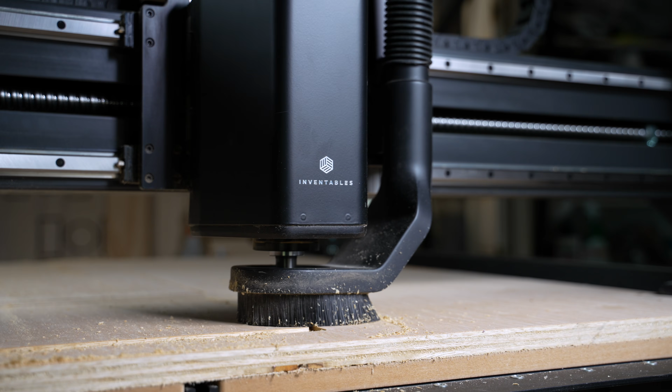Now, before we cut it out, we actually need to design it. And for that, we're gonna jump into Easel Pro.

Now we're just gonna be designing a single cabinet, but you can definitely use this entire process to do a full kitchen build out if you wanted.

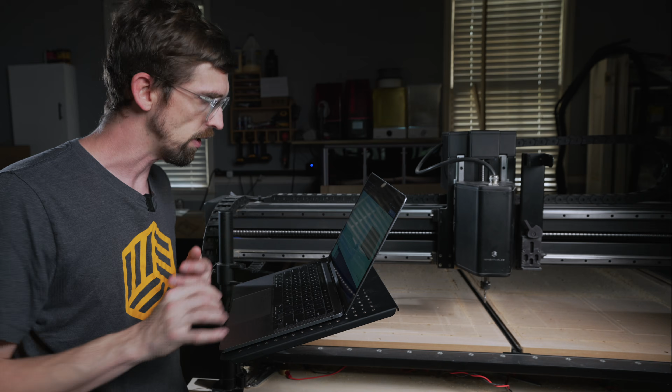So a quick overview of Easel over here on the left side, this is where you're going to be able to do all of your designs. You can see we can add simple shapes, text, pro designs, all kinds of stuff right here.

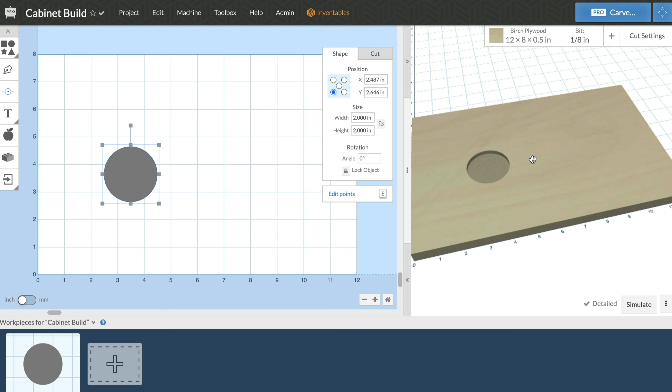Over here, this is actually giving you a real-time preview of what your design's going to look like. So if I just threw in a circle, you can see that my circle is now on the material and get an idea of what it's going to look like.

Then up here at the top, you can define your material. So right now this is 12 inches by 8 inches by a half inch thick.

And then when you have an object selected, you can actually define its shape, so you can move it around to different positions. So we could put it at 0 if we wanted. We can also define its size. We can lock these dimensions, so we can make this 3.

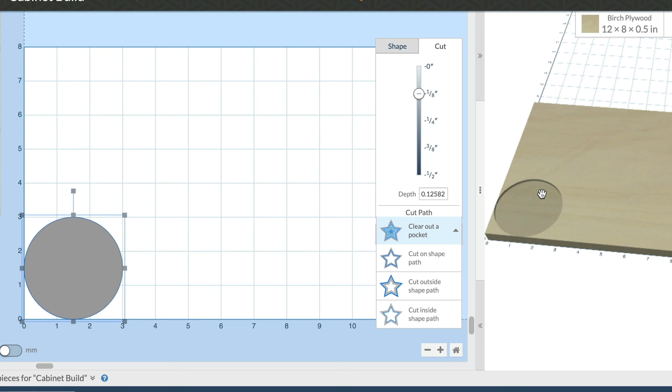And then you can define the cut, so this is gonna give you the depth of cut. Since our thickness is a half inch thick, this can go all the way down or all the way back up. And you can also define how this is going to cut. Right now, this is making a pocket, but you could also make it a cut along the path. This can go all the way down and it would cut that piece out, and you can actually see that it's going to cut through the material as a result.

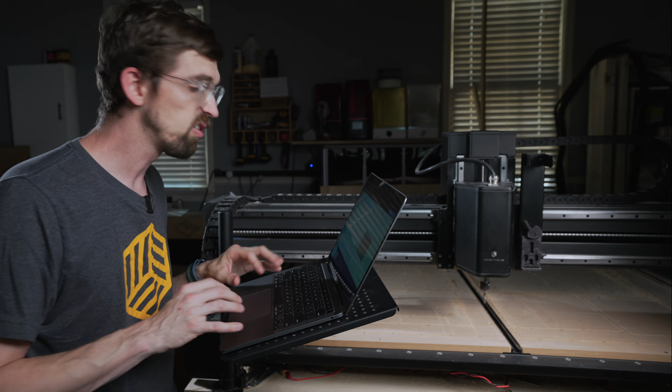So let's actually do our design. In this case, we're gonna be using the X-Carve Pro, and then we are going to set up our material.

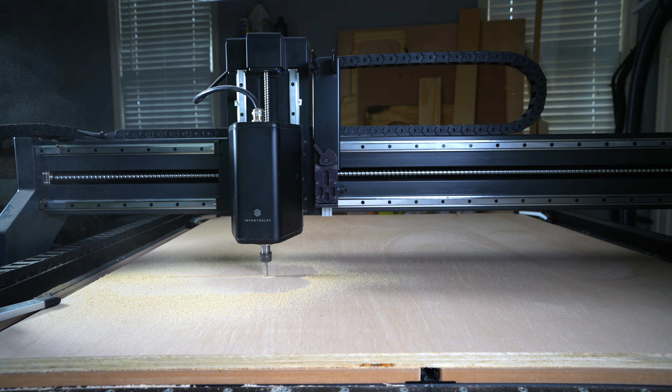So the workbed on the X-Carve Pro is 4 by 4 feet, but you can actually go longer, and you could actually do a full 4 by 8 foot sheet, and you're gonna be using tiling. We're gonna get deeper into tiling in a future video.

So for this example, we're gonna be using a 4 foot by 4 foot sheet, so 48 inches, and then it's going to be 3/4 of an inch thick. Now you can see this is pretty much our entire work area. So if I zoom all the way out, this is what I'm working with.

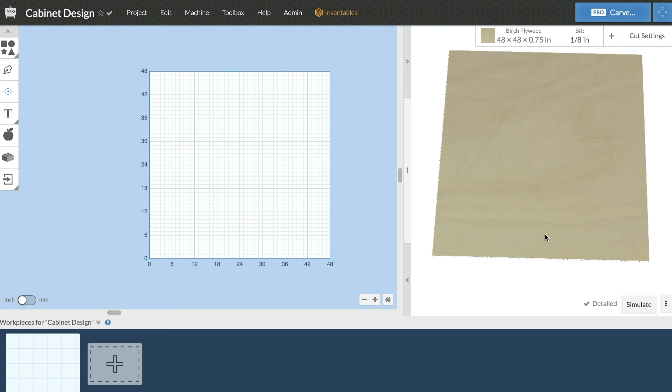Now to actually design our cabinets, we're gonna go into the Cabinet Maker app. The apps are over here by this little icon. You can see right here at the top, we've got our basic cabinet designer. This is gonna pull up a little module that's gonna walk you through the full process.

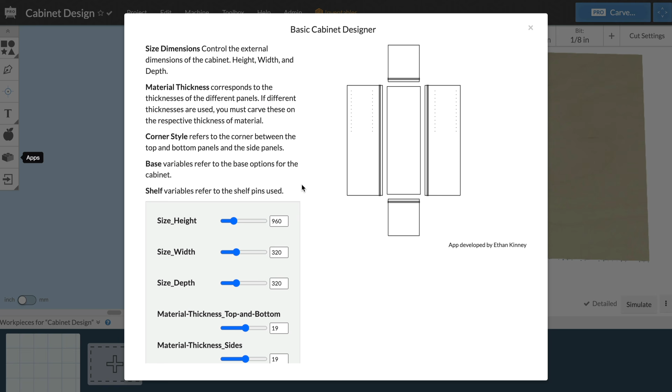Now, one thing to note, these are Euro style cabinets, so they are frameless, meaning you're not gonna have any type of face frame that's going to be on the front of your cabinet. Also, everything currently is in millimeters, so we're just going to have to convert it.

So our height is going to be 30 inches, which is 762 millimeters. Our width is going to be 20 inches, which is 508 millimeters. And then our depth is going to be 7 inches, which is 177.8.

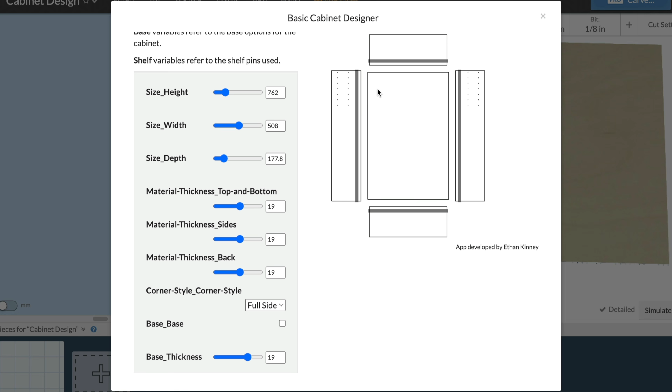So by default, all the material thickness is already set to 3/4 of an inch, so 19 millimeters. We're not going to have to adjust that. And you can see as we are adjusting our heights, our widths, and our depths, it's actually giving us a preview of what it's going to generate over here on the right side.

So this is a flat pack version of our cabinets. You can see that we've got our top, our bottom, both of our sides, and then our back right there in the middle.

And we're actually gonna create our shelves and our door in a separate workpiece here in a minute. Now the corner style basically is, do you want your sides going all the way to the top? So if you looked from the top down, you would actually see the sides of your cabinet, or do you want the top going all the way across? So if you look at it from the top down, you only see the top.

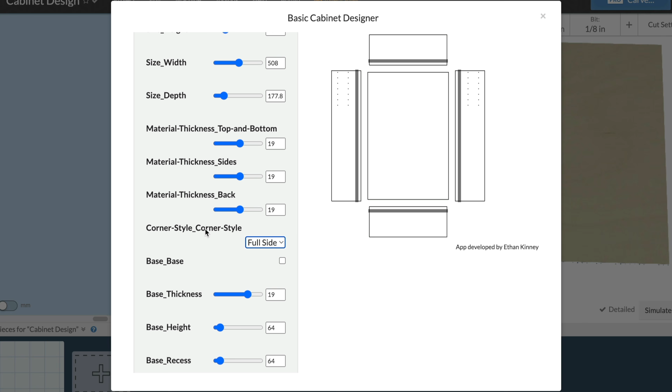That will depend on where you're going to put it, but in my case, I wanna have the top and the bottom go all the way across so you don't see it when it's hanging up on my wall. So for that, we're gonna select full top. You can see that our sides get a little bit smaller and our top and bottom get a little bit bigger.

So we're not gonna do a base, but if I did select it, you can see this is basically going to add a toe kick to your cabinet. So if you're gonna be doing base cabinets, that is where that would be. And you have all of your settings for that.

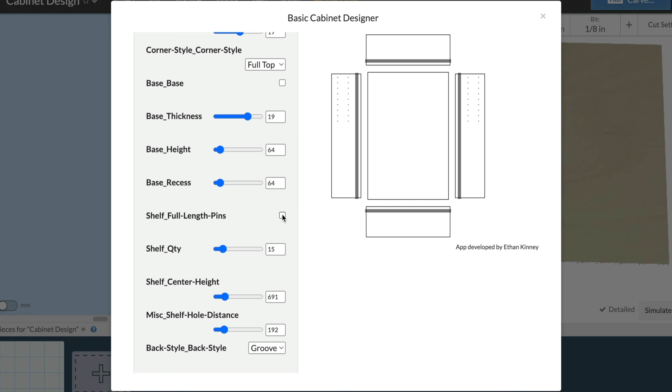And then we have shelf pins. So you could define the number of pins that you want with this slider, but in our case, we're actually going to do shelf pins all the way down the side. So I'm just gonna select that. So none of these settings we'll have to worry about.

And the very last part has to do with how you're going to connect these pieces together. Right now, you can basically, we have a dado on all the sides, meaning you're gonna have a slot that's about 3/4 of an inch, and that is how you're gonna connect it together. You could also have that go all the way to the edge, so it's more like a rabbet. And to do that, you would select your back style as flush. And you can see that goes all the way to the ends.

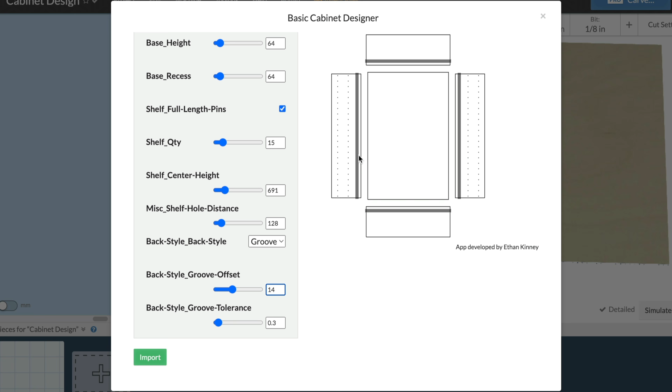But in my case, I actually am going to do a groove because I'm going to use that to mount it to my wall, because I'm going to screw in a 1/2 inch thick board and then put the cabinet on top of it and then drill through it. So I basically need a 1/2 inch gap on the back of my cabinet. So for that, I'm going to put in 12.7 millimeters or 1/2 inch, and that's going to get me pretty close. And then you can adjust your tolerances depending on the material that you're working with.

Now, once all of this is done, we're going to click this import button here at the very bottom. And you can see once I do that, everything gets placed on my board. And over here on the right, you can see a preview of what this is going to look like. So now we have our top, our bottom, our back, and our sides.

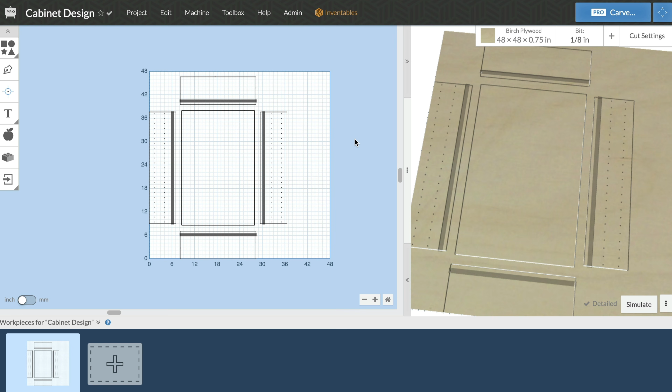We actually need to go ahead and make our door. And to do that, I'm going to do that on a brand new workpiece. And you can add workpieces down here at the bottom. That's what that big plus is. This menu might be collapsed. If that's the case, just hit that arrow. It's going to pull up.

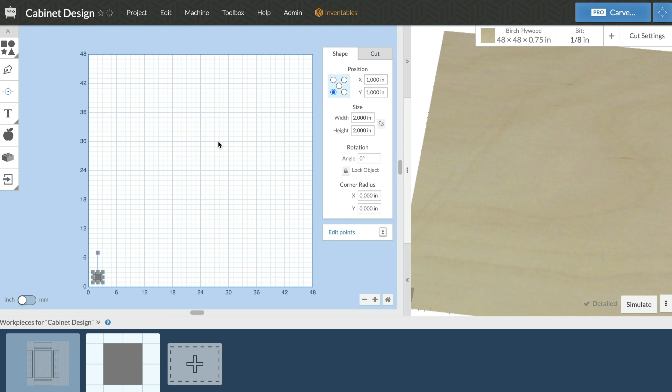So I'm going to select a new workpiece, which is basically like making a new page or a new artboard. And I am going to add a square because I want my door to be the same size as the front of my cabinet. And again, the size of that cabinet is going to be 20 inches by 30.

Now I'm going to come over to the cut menu because you can see right now it's basically making a big pocket of the door, but we don't need that. We just need the door cut out. So to do that, I'm going to flip this over to cut on the outside of the path. And we're doing it on the outside so that our dimensions stay the same.

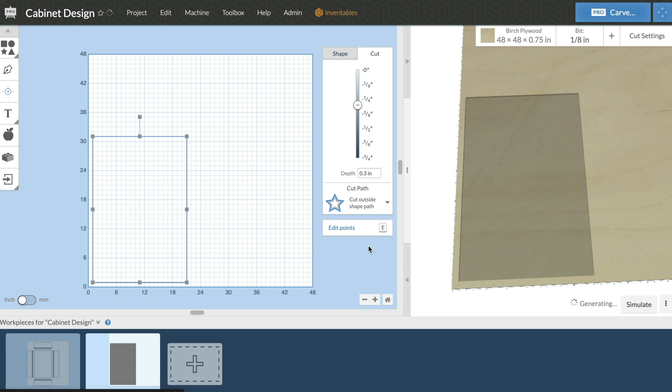If we did it on the path or on the inside of the path, then you're going to be taking out some of the material because of the width of the bit. So if you actually want the piece to be what you put in the numbers to be, make sure and select cut on the outside. And then I want to make sure this is all the way down at the bottom at 3/4 of an inch. And once I do that, you can see that we have this cutting out.

And now we're going to add our shelves. And so our shelves, the width is going to be the inside width of our cabinet, which is going to be 20 inches minus the thickness on the side. So 2 of the 3/4 of an inch or 1.5 inches, which is going to give us 18.5 for our width. And then for our depth, it's going to be 7 inches minus the thickness of the material. So that gives us 6.25 minus that 1/2 inch gap we have in the back. So 5.75 inches, and that is going to be our height.

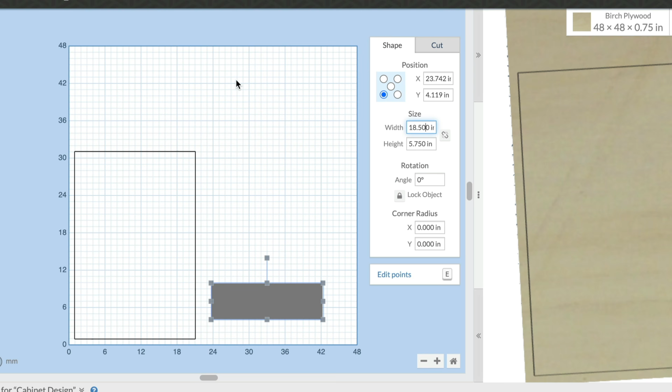Now that might be a little bit different depending on what your tolerance was. And then sometimes what I actually do with the shelves is I'll just assemble the cabinet first, and then go in and measure the shelf since you're just going to be sliding it in anyway, and then see what that depth is going to be. Just in case something isn't perfectly square, we can make sure that it's actually going to fit. And again, like our door, we want to make sure our cut is going on the outside of the path and it's going all the way down.

Now I'm going to do 3 of these, so I'm going to do Control-C, Control-V, and Control-C, Control-V. Now from here, you can definitely go in and move your pieces around to try to fit as much as you can on one board. But for the sake of the time of this video, we're just going to keep it as it is right now. Now, one thing we are going to go ahead and add to the door is the actual hinge.

So we're going to be using soft close frameless hinges. So they have a circle pocket that is 1.25 inches, and you go in about half the thickness of your material, so 0.375 inches. So you can definitely use a drill press or something later to do that, but since this is already on the machine, we might as well carve it out from here. Now the trick that I do to get that is first center everything on the 0, 0 position or the origin of your work bed.

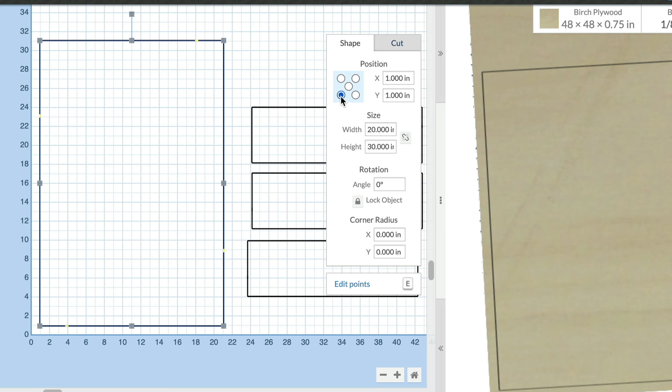So I'm going to select my door, then over here on the position, you can see it's at 1 and 1, and it's lining up on this corner. So what it's saying is this bottom left corner is at 1 and 1. I want that to be at the origin. So if I put this to 0 and 0, you can see it moves down to the origin. Now I do that because now when I go in and add a circle, which is going to be how we do our pocket, I'm going to be able to position it relative to the origin, so I'll make sure everything is spaced right. But before we do that, we know that the size is going to be locked.

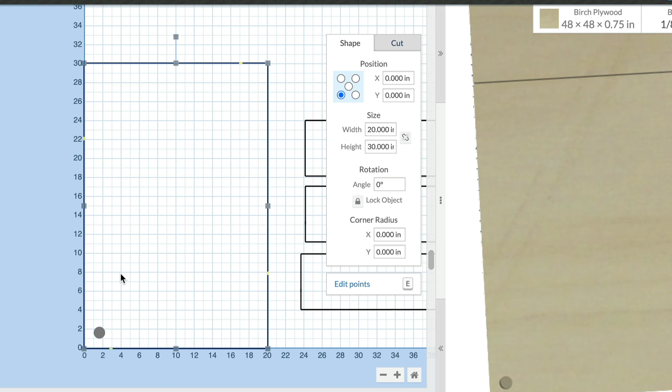So first off, I'm going to hit that chain because I want the width and the height to be the same. I'm going to do 1.25 inches. And now we have a 1.25 inch diameter circle. And then the spacing of the hinge is going to depend on the one that you get. But let's say that your hinge needs to be 1/2 inch from the edge of the door. You can do that by, again, using your position. So this bottom left corner right now is 1 inch away from the edge, and we want this to be a 1/2 inch. So I'm going to set my X to be a 1/2 inch.

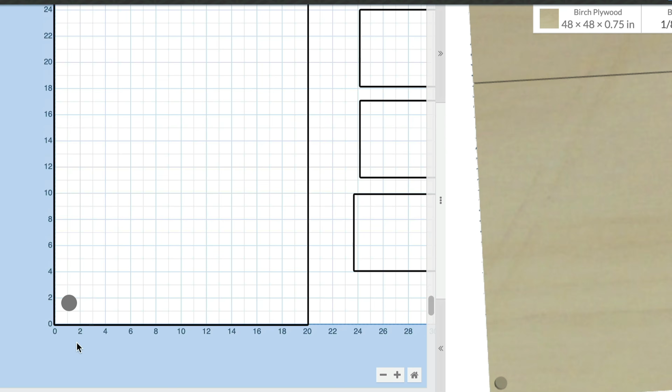And then typically with the hinges, they're not going to give you a specific location in terms of how far it is from the top and the bottom. They just want that to be equal. So for this, I'm going to go ahead and go with 2 inches. And then I'm going to create one more, Control-C, Control-V, and then I'm going to mirror that position from the top.

So we know that our door is 30 inches tall. So if we want to come down 2 inches, we're going to go down to 28 inches. To do that, we need to make sure you're selecting the top left corner because we want that distance to be 28 inches to give us the right gap. And then we want this to be 1/2 inch from the side.

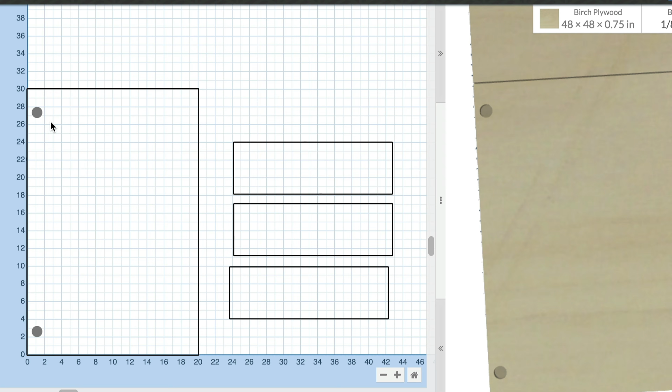And then we want to go ahead and set the depth. So you just select the 2 circles. And then depending on the hinge, this is going to be different. But let's say it's half the thickness of the material, so .375 inches. And then from this point, you can select everything and you can actually move it around as one piece.

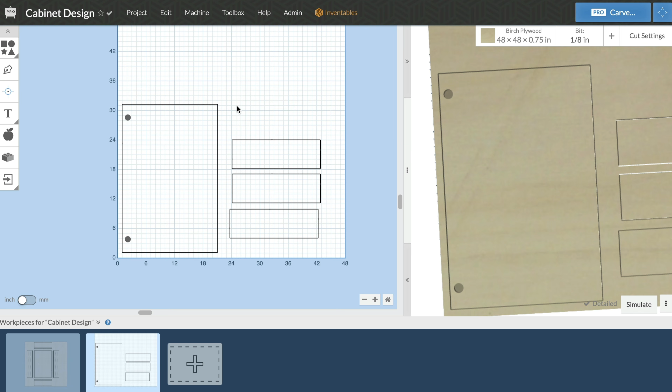And then from here, you can go around and arrange your pieces so you're using the least amount of material possible. If you select multiple objects, your align menu is going to come up. So I'm going to center everything to the left, and then you can adjust the spacing so it's even going up and down or left to right. Now, I'm not going to fully optimize it right now just to save time, but just know that would be your next step. So that's the design or CAD portion of Easel.

Let's talk about how it generates toolpaths or the CAM side of Easel. So we've already been doing some of that work because we've been setting our depths of cut, but we also need to set what type of bit we're going to be using. So if you come up here to the top, you can select what bit that you want to use. And for this example, I'm actually going to be using a compression bit from Onsrud.

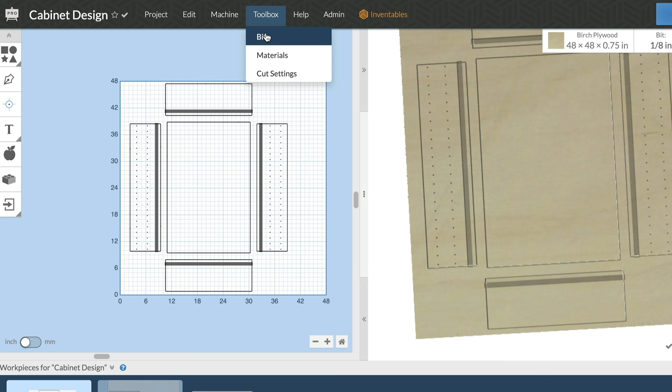So whether you're buying your bits directly from us or you have your own custom bit, this is how you can add it. So if you come up here to the toolbox, you can see we have bits. You select that and then you can add in either an end mill or a V-bit. To do that, you just click Add Bit and then you can select Inventables or Custom. In my case, this is the Onsrud 60-113MW, long name, and this is a compression bit with a cutting diameter of 0.25 inches.

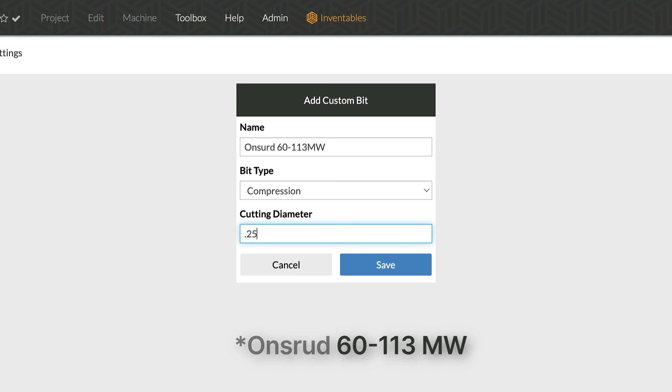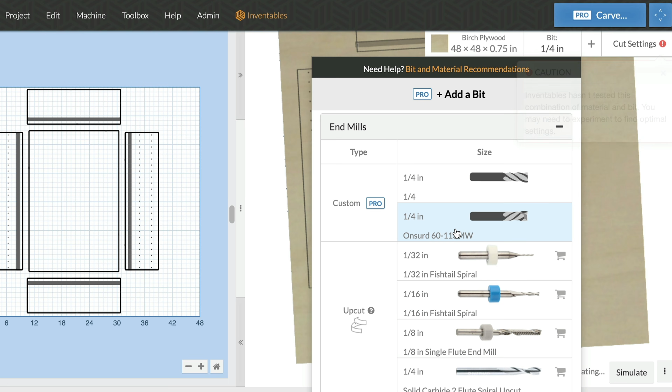And we'll get into all the different types of bits in the future, like upcut, downcut, compression, but for this video, we're just going to select compression and hit Save. So now you can see that it is showing up right here. And if I hit X and I come back up to the bit menu, this is now an option. Now you're gonna get a warning saying we haven't tested this bit with this material, meaning that it's not gonna give you an updated automatic cut setting.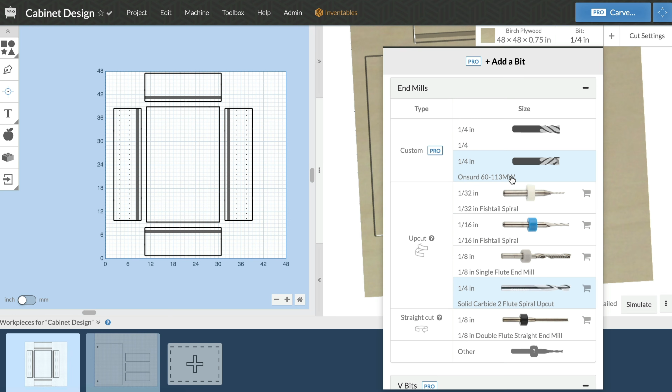So if we actually went in and selected this solid carbide 2 flute, this is one from Inventables, that warning goes away. And now you can see these cut settings have changed. So a second ago it was 30 inches per minute. Now it is bumped up to 128. But for this example, and if you're using a custom bit, you can still adjust those cut settings by just jumping over to manual. Now the feed rate, plunge rate, and depth per pass, again, are a whole other conversation that we'll do in another video. So that's why we definitely recommend just going with our recommended cut settings and then adjust it from there if you're using bits from us.

But for this example, we're gonna be going up to 250 inches per minute. We're gonna do a plunge rate of 30, and then our depth per pass is going to be the thickness of the bit, so 0.25 inches. And then I'm actually gonna drop my RPMs down a little bit to 14000.

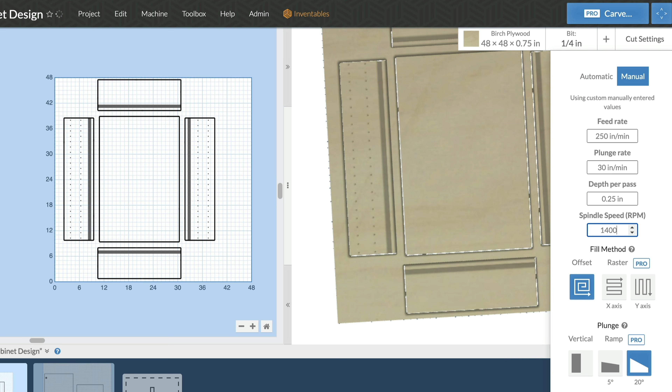And then you can adjust the fill method, and that is if you're doing a pocket. Basically, is it gonna go side to side, up and down, or go around in a circle? The only pockets that we have are gonna be for these dados, but because of their width, they're just gonna be going up and down anyway. So keeping it at the stock setting is totally fine.

And then at the very bottom, you get the option to do a plunge cut. When it first starts its cut, it's gonna go down 1/4 inch, which is our depth per pass. It's just gonna go straight down. If you ramp it down, you can see you're gonna have a 5-degree or a 20-degree option.

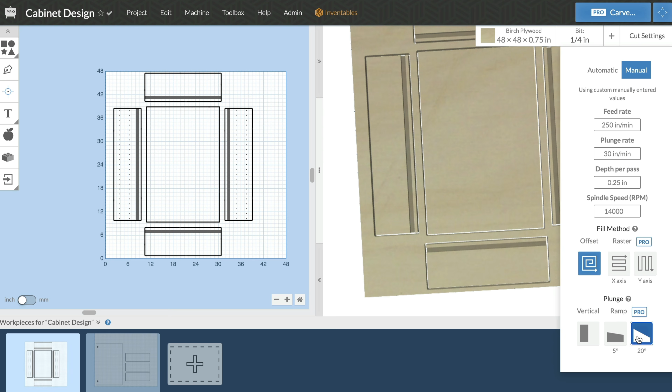It's gonna be a lot less stress on the bit and the machine, and you're gonna get a lot nicer cut. It's gonna add a little bit of time, but especially when you're doing higher feed rates, it is really helpful. And typically we have a 20 degree set as your automatic setting anyway. So just keep it like it is, and then we are good to go.

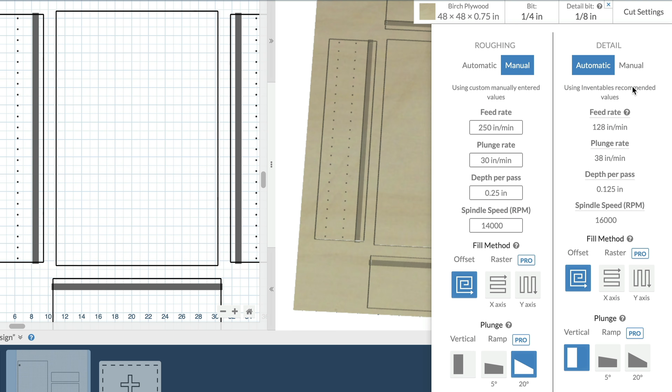Now, one thing you might notice is we are cutting everything out, but you're not seeing our holes for our shelves. And that's because those pinholes are thinner than 1/4 inch, which is the bit that we are using. So because of that, you're actually going to add an additional bit. So I'm gonna select this double flute straight end mill to do these holes. And if I come over to the cut settings, you can see we now have 2. So our roughing and our detail. Now, because we've used this before, you're gonna get some automatic cut settings.

Now, at this point, Easel has everything it needs to actually generate the tool path. And you can get an idea of what that's gonna look like by hitting the simulate button. And you can see we're getting 2 different times. That's 6 minutes, that's going to be our 1/4 inch bit. That's cutting out the majority of our pieces. And then the 33 minutes is going to be for all of our holes.

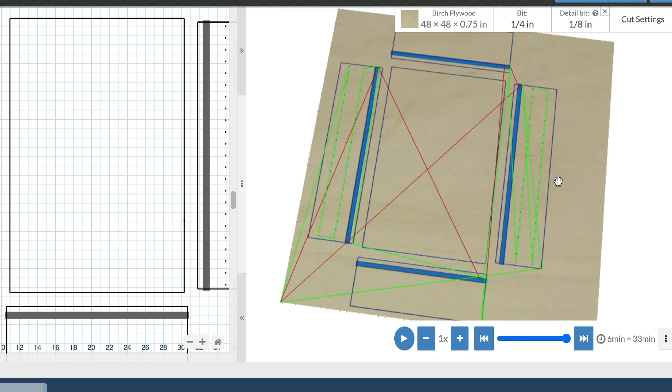Now, you can actually play this back, and you can adjust how fast it's going, and you can see how that bit is going to go across our material. Then anything in red is going to be when it is moving between cuts. Our first cut is going to be in blue, and then our second detail cut is going to be in green. You can see it's doing the green right now.

Now what's really nice is you get a pretty good estimate on how long this is going to take. And we find for folks that are especially quoting out different cabinet jobs, knowing how much machine time you're going to be using before you even do the carve is really, really nice. Because you can basically throw in whatever design you want, you can play around with it, you can build that into your quote or your estimation for your project.

So the next step is to actually work with your material. In this case, I'm using 3/4 inch plywood, and I've actually already cut it down from a 4x8 sheet to a 4x4 sheet just to make it easy for filming and for you guys to see. And you can see that it's sitting on the machine right now. Now you don't actually have to cut this down. You could use our tiling feature inside of Easel, and you could use a couple outfeed, infeed rollers on the front and the back of the machine just to support your material.

So our next step is going to be clamping down our material, and we're going to be using the T-slots on the machine. You have one on both sides, as well as one right here in the middle. We're just gonna clamp it down on the 4 corners for this material, but you could also use brass screws and actually screw this into the workbed.

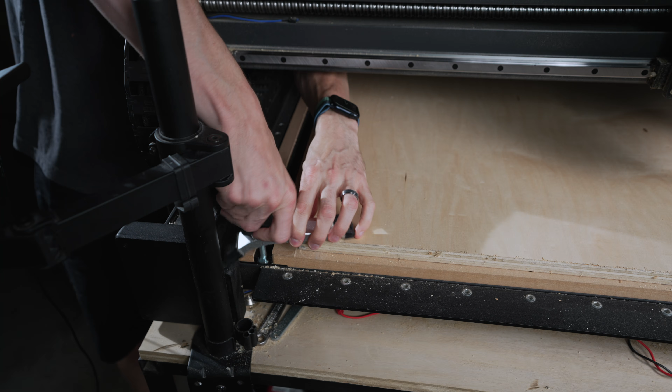And then if you use brass, it's really soft, so if you do happen to hit it with your bit, you're gonna be fine. But you could actually pre-drill your screw locations inside of Easel, so you can see exactly where it's going to cut out, and then you can just put little holes around it for your screws. But in our case, just having those 4 points of clamping, it's going to be totally fine. So you just slide in these clamps, and then screw it into place. And then we're gonna do this to all 4 sides, and then we have our material secured.

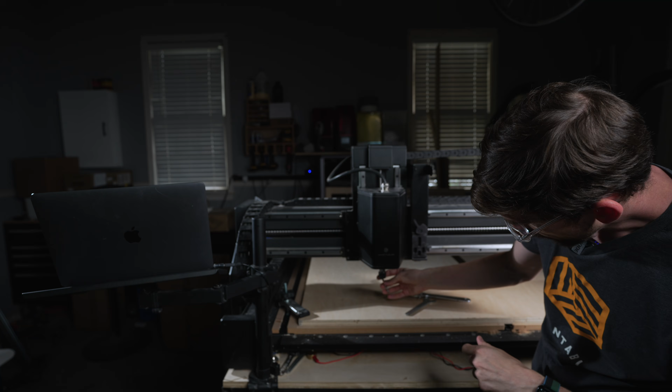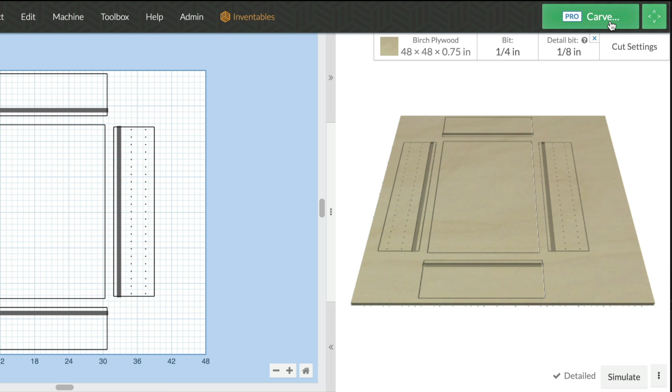So we're gonna be using this 1/4 inch bit, and you just slide it into your collet, tighten it down, and then using some wrenches, we're gonna make sure that we have it tight. So now that we have our material on our machine, as well as our bit inside of our spindle, we can go ahead and turn on the machine. The power button is on the controller, which right now I have on the very back of the machine. And then when you turn it on, you're gonna see these 2 buttons at the top are green inside of Easel. This is going to be your jog menu.

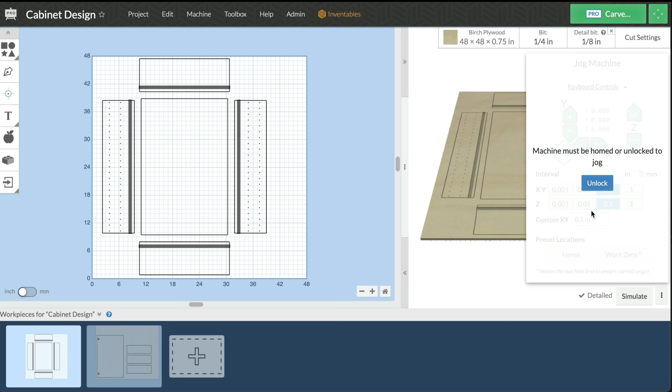And in order to actually unlock the jog menu, it's gonna ask you to home the machine. Again, homing the machine is going to bring the spindle to the very top, and then the X and the Y to the 0 position right here. And you want to home your machine because at that point it always will know how to get back to the position it was before, especially if you're doing multi-stage cuts like we are, or if you lose power or something messes up and you need to restart. Make sure to always home your machine the very first thing that you do. So we're going to unlock it, and we are going to click home.

So one thing to note is I've got this laptop stand, which is this right here. So this doesn't come with the machine. That's also why this is really close when I'm doing the work zero. I just have it clamped down at the table at the bottom.

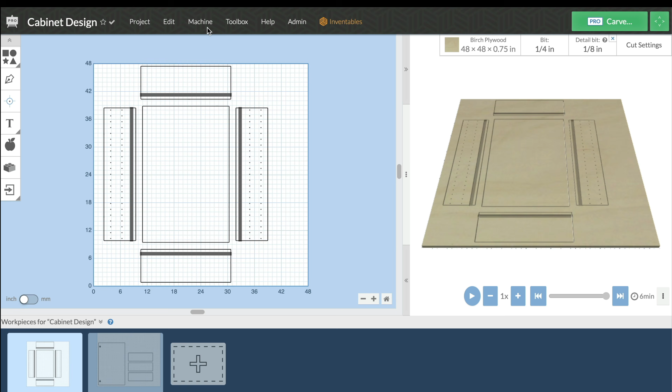Now there is one setting you might want to change that is outside of the typical menus, and that has to do with your safety height. If we come over here to machine, come down to general settings, you're gonna see your safety height as well as your origin safety height. And all the safety height is the distance that the bit comes up when it's traveling between tool paths. So in this case, it's coming up 0.15 inches, so it makes sure it doesn't hit any material, then it's going back down. But you can actually set a different origin safety height, and this is how far up the bit will travel at the very beginning.

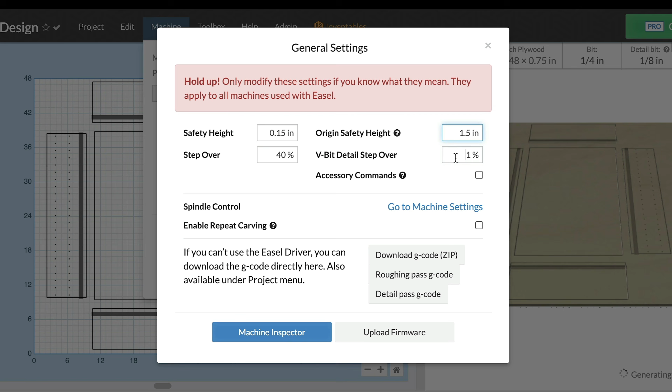Now I'm gonna put this at 1.5 inches, and that's so that I can clear my clamps. Now initially, I wanna make sure I'm clearing the clamps and clearing all the knobs, but once we're actually carving, I want the safety height to be smaller because I'm not gonna be getting close to those clamps. And what that does is it saves you a lot of time that it's not having to come up and come down that extra distance while this is cutting out. So now that we have this set up, we can walk through the cut setup menu.

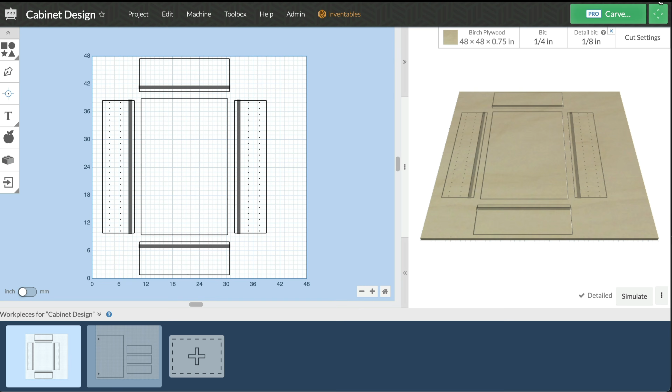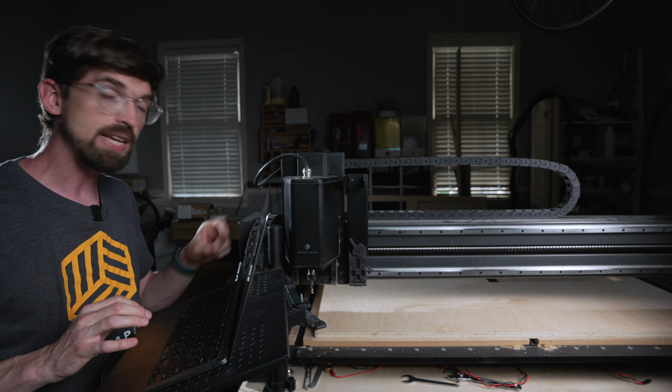All right, if I click on the carve menu, I'm gonna get this step-by-step process to make sure you're set up before you actually start your cut. So first we're gonna confirm our material. So this is birch plywood, it is 0.75 inches. Again, you wanna make sure you actually measure your material, so don't go off of just what you get. Next, we're gonna let it know that the material is secure. And we are going to be doing the roughing pass. Again, the detail pass is just gonna be for the holes. We're gonna be using this compression bit that we've already set up, this 1/4 inch compression bit.

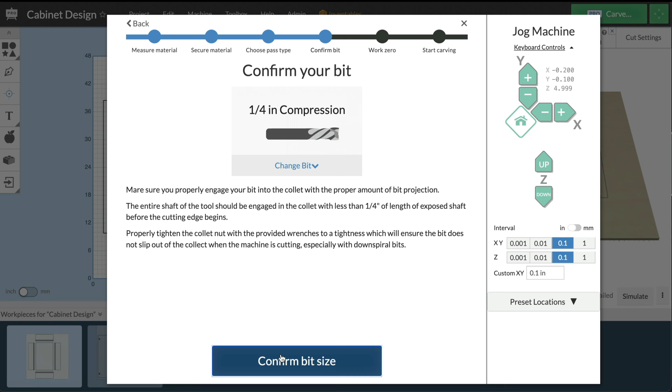Now we're going to zero in the Z axis. We don't know the distance between the end of the bit and the top of your material. So we're gonna use our Z probe to do that. And the Z probe plugs into your controller right here. And then you have this brass puck as well as clamp. This you're gonna put underneath your bit when you run it, and this is going to be clamped to your machine. I'm gonna move this over a little bit just so you can see it a little bit better.

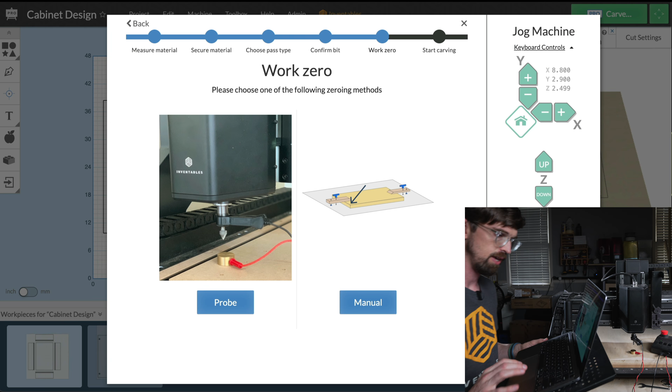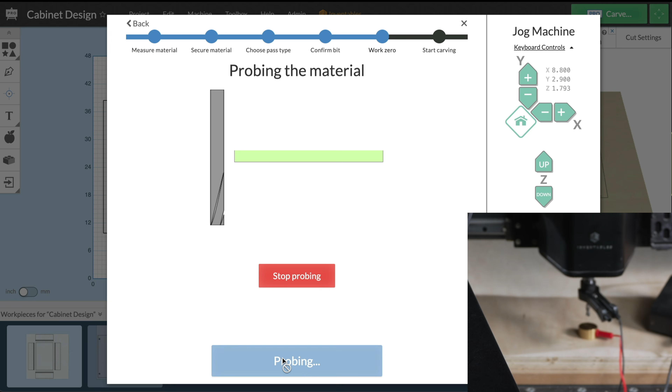And then to probe it, we're gonna click probe, going to confirm the position because it is over the material. We're going to attach our clip. It's already been attached. And then we are going to touch the plate to the bit to make sure we have connectivity. Gonna do that, and when we do that, this is going to turn green. And now we are going to start probing. And then I'm gonna click that our Z probe is put away.

Now our last step is to set our XY0. So we just found our Z0 position. This is going to be the XY0 for your workpiece or your work 0. This is not the same as your machine 0. Machine 0 is what you find when you actually home your machine. The machine 0 is the furthest left and the furthest front that it could possibly be, but depending on your work material, that corner edge might be different. Now in this case, we're using a 4x4 sheet, so they're pretty much the same.

So what I need to do is just reposition this over this corner, and I'm actually gonna move this clamp this way, just so I make sure the toolpath doesn't hit the clamp while we are carving. And that's one thing you want to make sure is that none of your toolpaths are interfering with your clamps when you're cutting this out. So I'm going to use these jog commands.

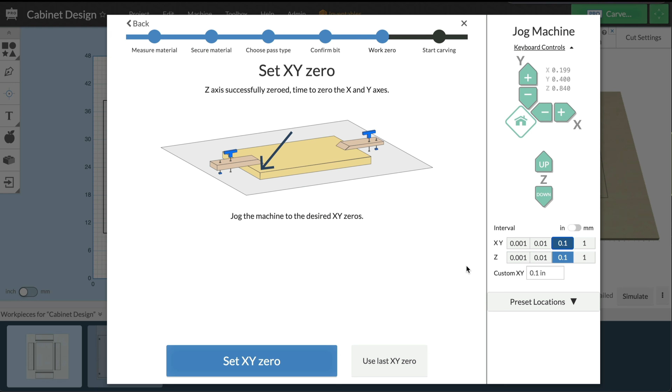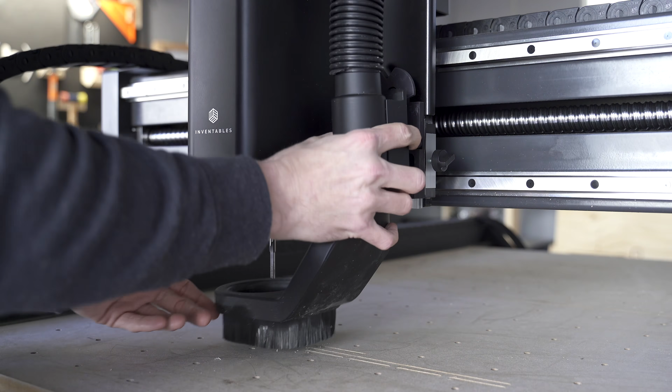Move this over. And then once you have the position that you want, just hit set XY0. Now that position is saved and we're gonna be able to reuse it in the future. Now at this point, you would connect your dust shoe, which is a pretty simple process. I'm not gonna do it in this case so you can actually see it carving out. So I'm gonna skip this.

Now since Easel can control the spindle, we're gonna turn the spindle on. Our spindle is on. And now we're gonna hit carve.

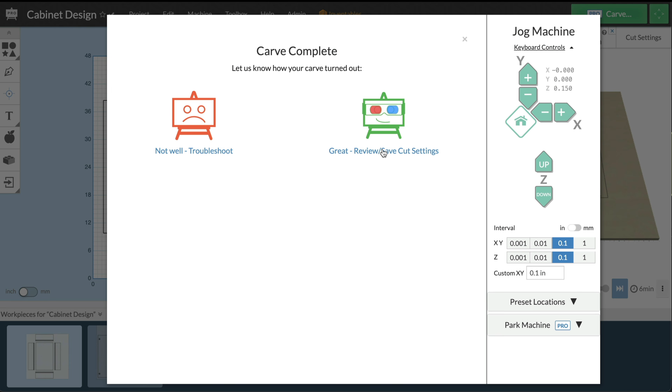Now, depending on how your carve went, you're gonna get a troubleshooting menu. If it did great, you can click this and actually save your cut settings. So if you did custom cut settings, you'll be able to save those for the future. And then if it did not go well, you're gonna get a lot of the common things that we see and the best recommended ways to fix it.

So once you run through that first roughing pass, you're gonna come back in and use your detail bit. In this case, this is going to be an 1/8 inch bit. We're using that to get our shelf pin holes. So you'll switch out the bit in the machine and then it'll run back through the setup menu. Everything is pretty much gonna stay the same except for 2 parts.

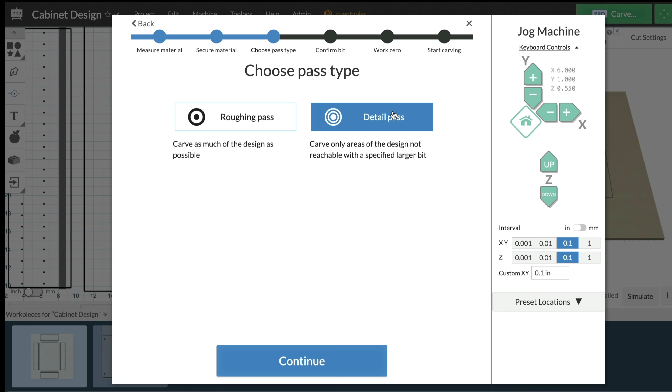When you come to your choose pass type, you're gonna click detail pass because now we're doing our detail pass, our 1/8 inch bit. Hit continue. You'll reconfirm that your bit sizes are correct. You will have to get the Z position 0 again, just because the distance between the end of the bit and your material is going to change.

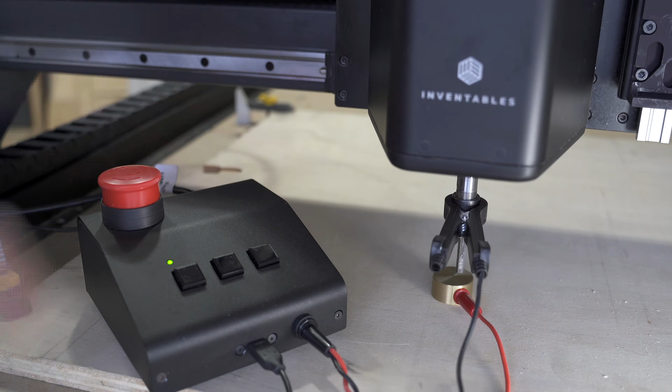And then to find the work 0, you actually aren't gonna have to move this around and re-find it again. Because we already found it in the previous tool path, you can just hit use last position. So that's already stored in there. So anytime you're doing multiple tool paths on the same material, make sure and hit use last position. And then from here, we'll go ahead and cut those holes out.

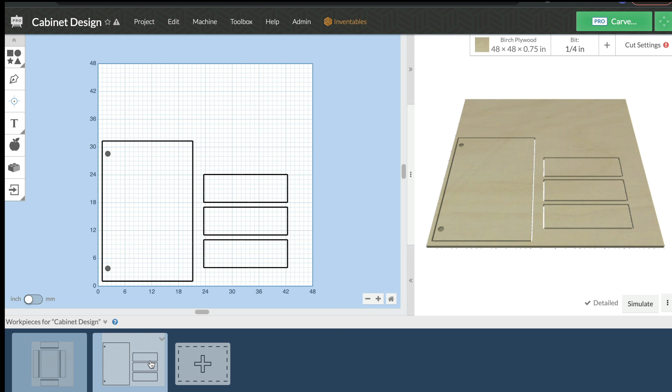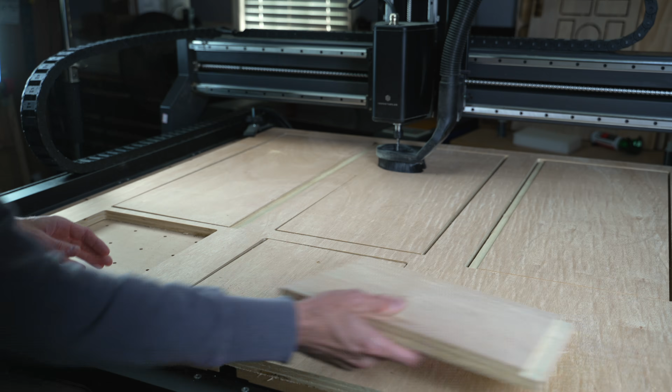And then last but not least, since we put our door as well as our shelves on a different workpiece, we're gonna go ahead and cut those out. So you'll select your workpiece here at the bottom, then go through that same setup process for the tool paths and cut those out. So now that we have all of our pieces cut out, we need to remove them from the material and they're being held in by those tabs. Now, depending on how thick and how wide those tabs are, they might be pretty easy to remove with something like a chisel or even like a small Dremel tool.

Now, at this point, you're ready for assembly. And if you're coming from a cabinet maker shop, this is going to be the part that you've done a ton in the past. In my case, I kept it really simple. I just used glue and brad nails to tack everything together. Then I came back with iron-on edge banding on all of those exposed edges so that you weren't seeing the plywood when you're opening up the doors or looking from the sides. Then I cleaned up all the glue spots, sanded everything, and then just painted it white.

And then depending on what hinges you've bought, it's gonna have instructions on how to install those and drill in the holes, as well as the pull for the door, and then the pins for the shelves. But overall, we wanted to give you the full process of going from design all the way to a finished cabinet with Easel Pro and the X-Carve Pro.